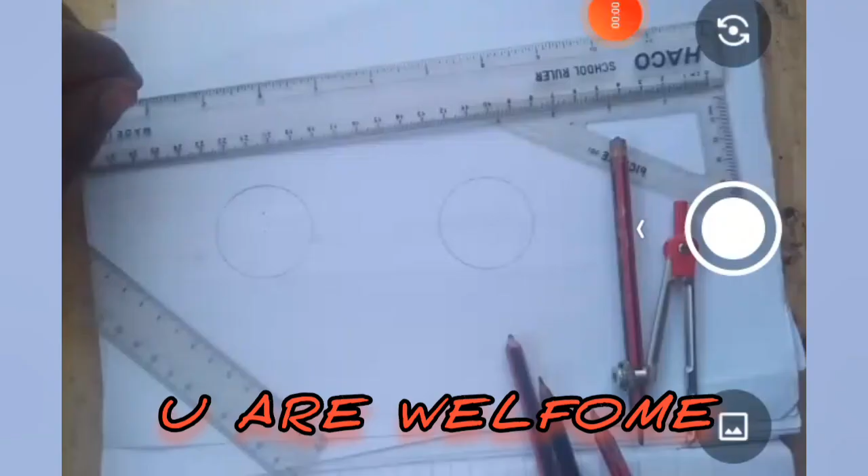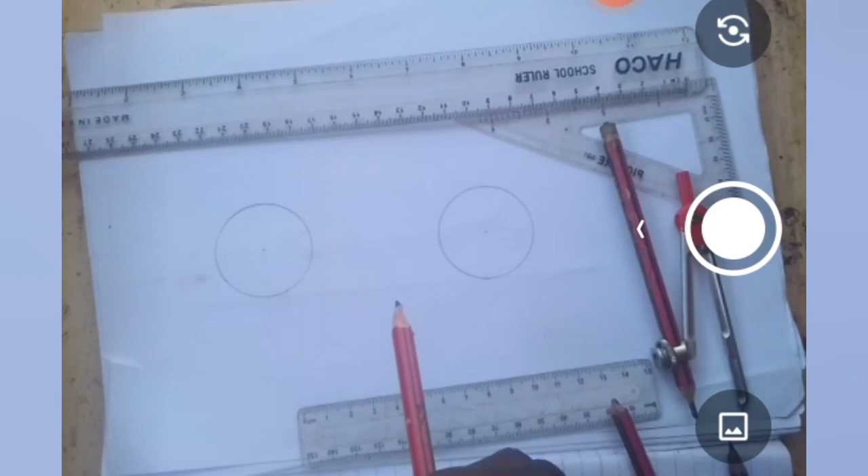We are going to learn how to draw tangents on two circles, but when the circles are equal. So we are going to learn how to draw a common tangent on two equal circles. Our first step, we begin with first identifying the radius of the circles. They are both 20 millimeters. Okay.

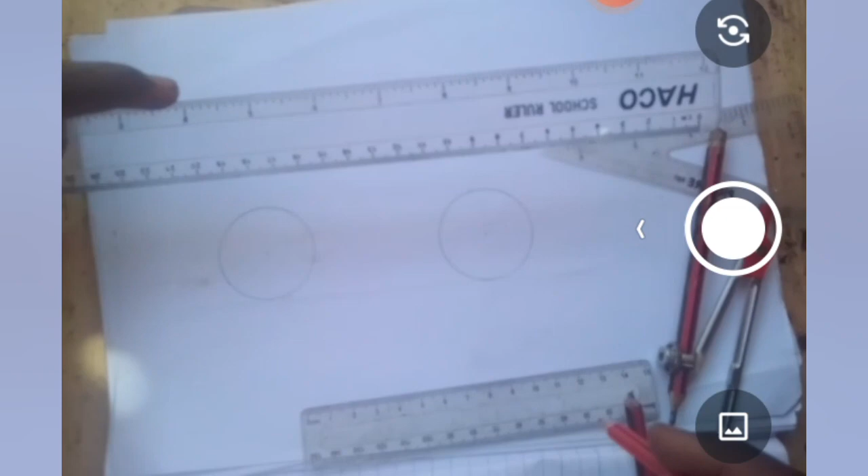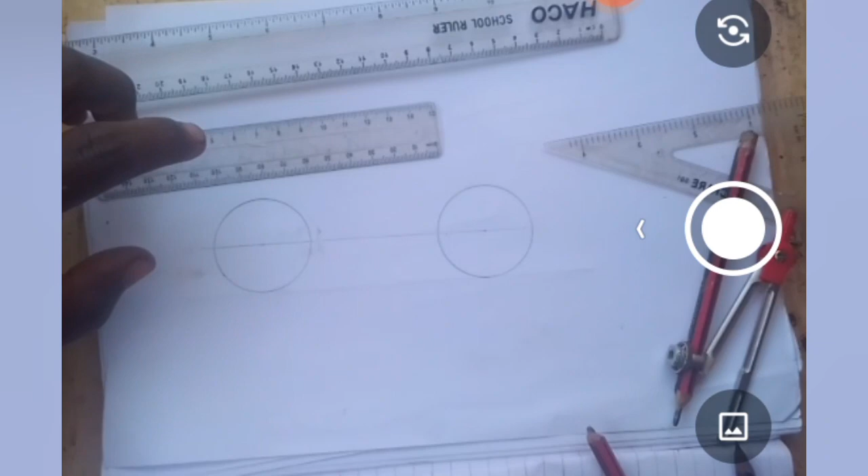The tangent that we're gonna draw is supposed to be a common internal tangent, and these are steps that you're supposed to follow. First, draw a straight line from the mid of the first circle to the mid of the second circle, and then mark the mids as point A and point B. After getting point A and point B, we'll be able to identify all the things that we need.

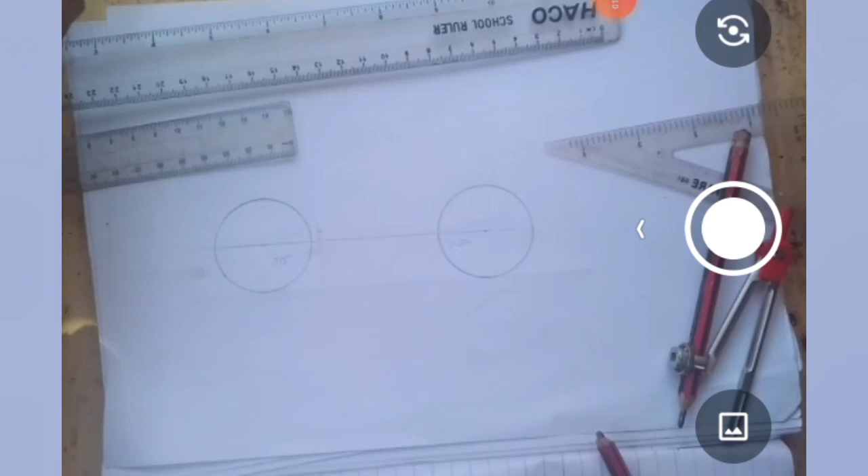Then after getting point A and B, we'll get line AB, and our first step is dividing line AB into two equal parts. And to divide this line, it's easy. I have to just drop a perpendicular onto it. So we are going to drop a perpendicular.

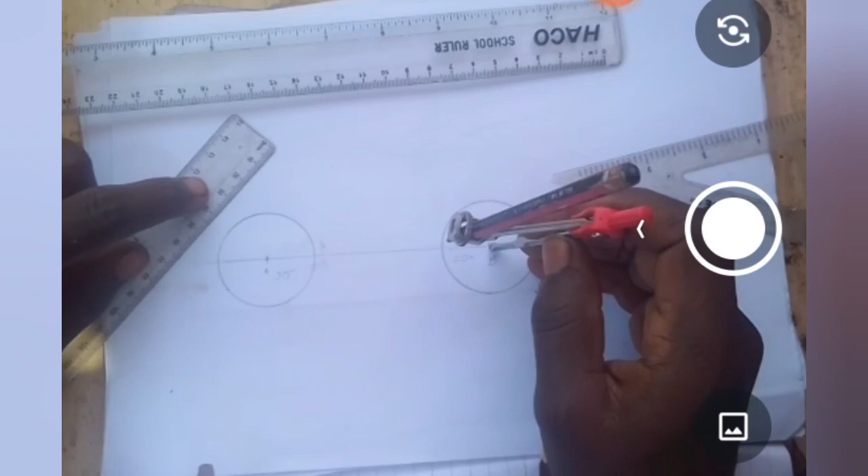So get your compass. After getting your compass, put it at point B, and then draw arcs up and down. Have to make it a little bit longer, arcs up and down. Then you go to point A also, you draw arcs up and down so that they can intersect, and after intersecting, then draw a straight line there.

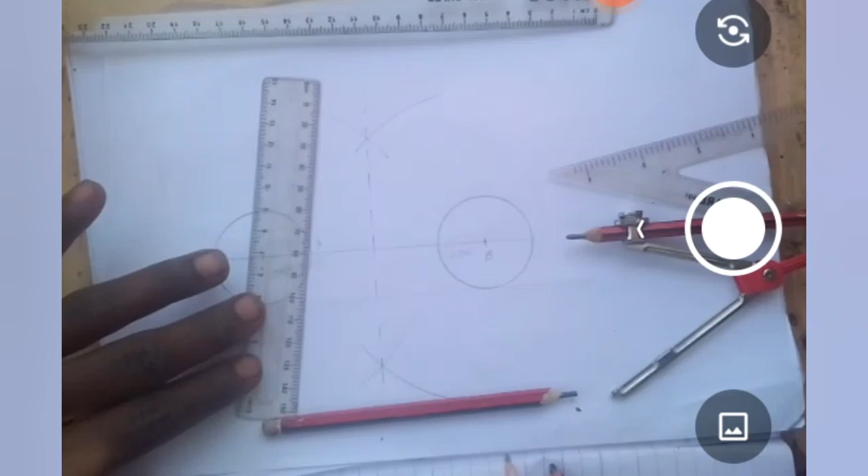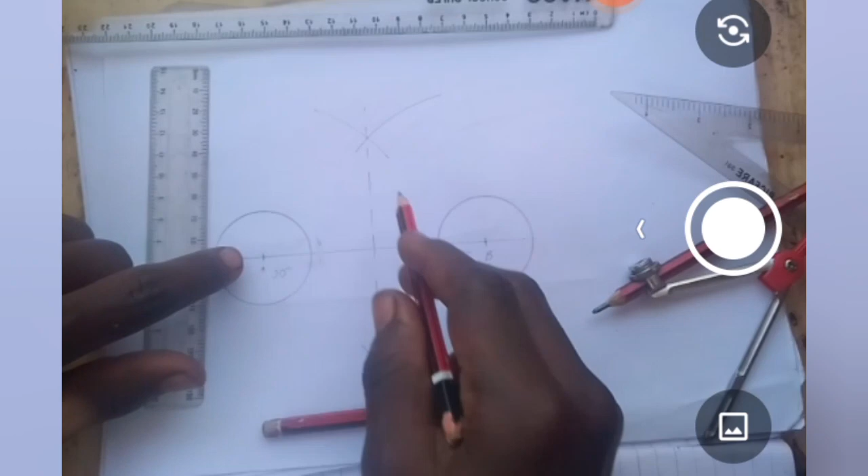But draw it dotted so that it won't disturb you. I'm going to draw mine dotted. So I think you see it's dotted. Then the second step is just drawing a semicircle. We've got a point of intersection on line AB, and this point of intersection we've named it point P. Now we are going to use point P as our middle point, and AP or BP as our radius, so that we can draw our semicircle that we need.

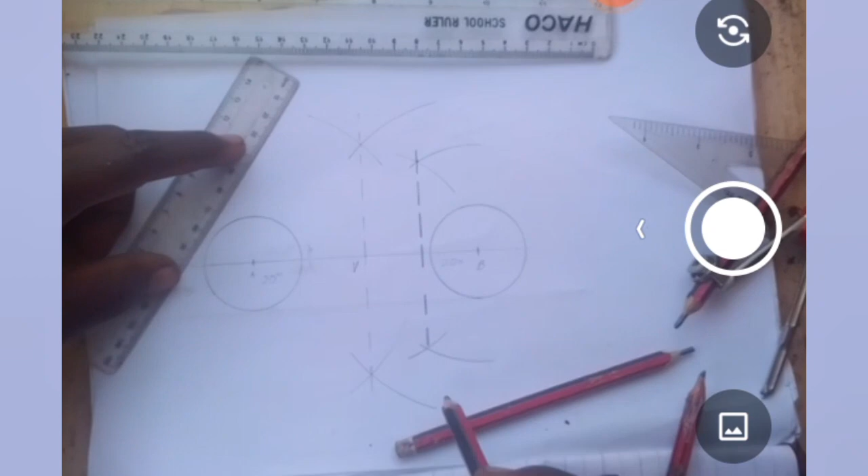Now you stand at A, measure. Right after bisecting that line, we get PB or AP. Then we have to choose one of the new lines that we've got. Then again we bisect that line into two also, giving us another point of intersection. I think you see that point of intersection, and that point which we've got is the one that we're going to use to draw a semicircle.

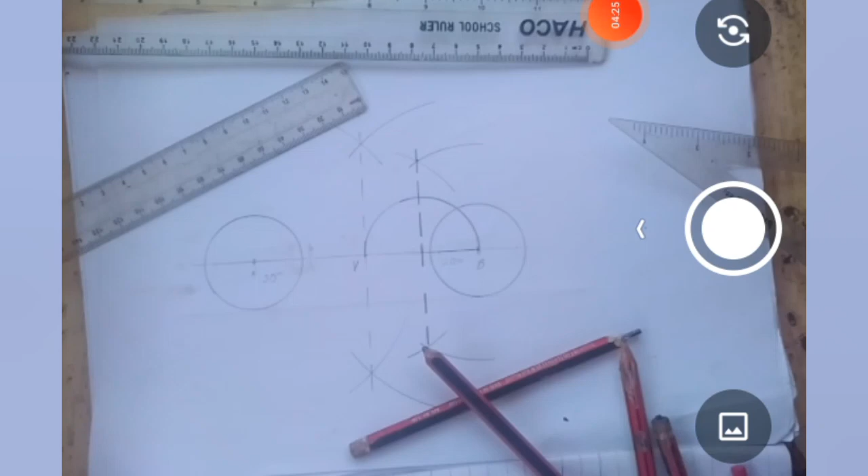We are going to use this new point, because we are drawing this semicircle only on line AB, from point A to B. This new point of intersection is going to work as our middle point, our center. Then we draw a semicircle from point A to B. Then where this semicircle intersects with the circle, it's our point of tangency. So we will call it point V.

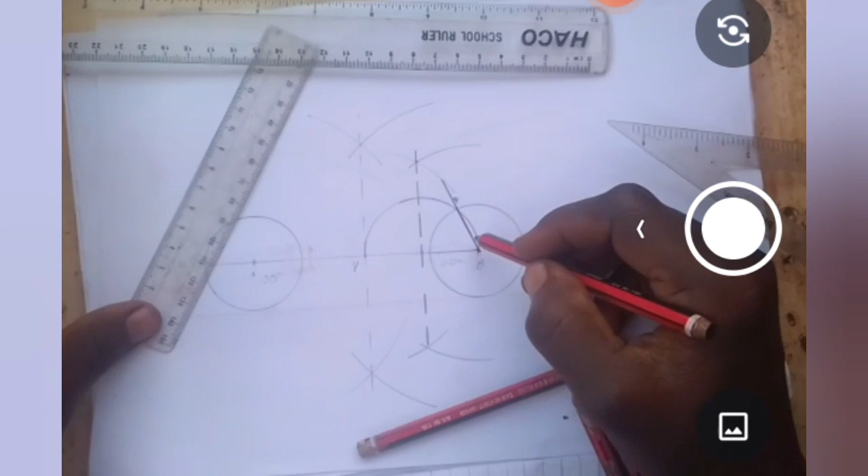Then you draw a line from that point to the center of the circle, and that line should be a little bit long so that it won't disturb you. We make mine also long. It has to meet at the center of the circle, and it will be our normal line.

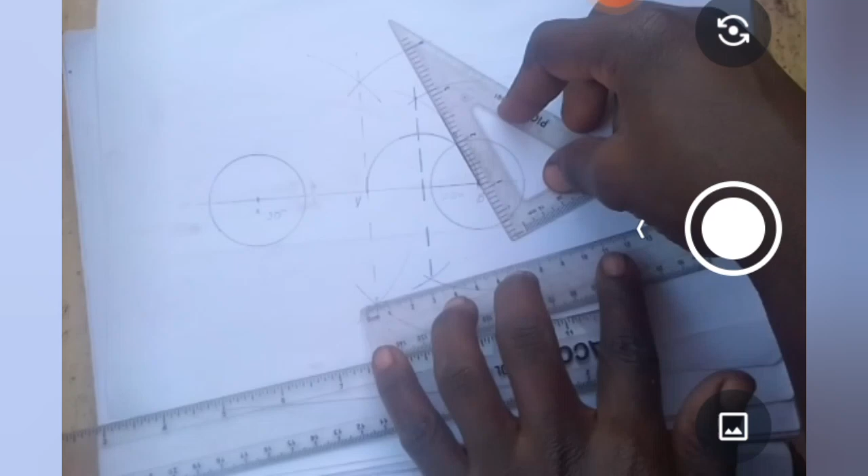Now we are going to slide. Sliding is very easy. Put the back of the set square on the line that you want to slide, and then the smallest part of the set square on your long ruler, so that you can slide. You have to make it accurate, and make sure that the long ruler does not shake. If it shakes, you can use a small ruler, but the small ruler won't be so accurate. You have to use a bigger ruler.

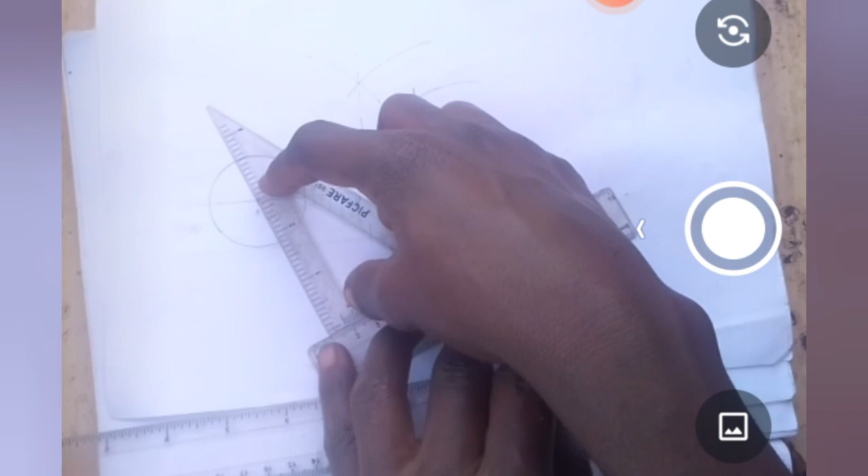Then you slide that line to the center of the other circle, and then you draw a line coming down, because it's supposed to be a common internal. It has to be inside, and that's another point of tangency that we needed, giving us another normal line. Then you get your pencil and your ruler, draw a line from point V to point X, giving us a tangent from point V to point X.